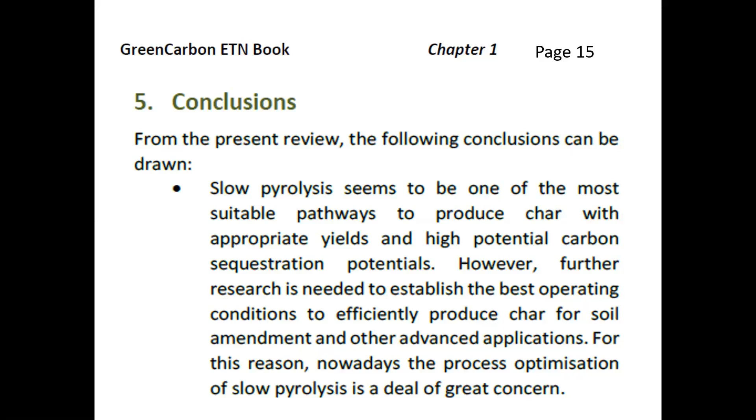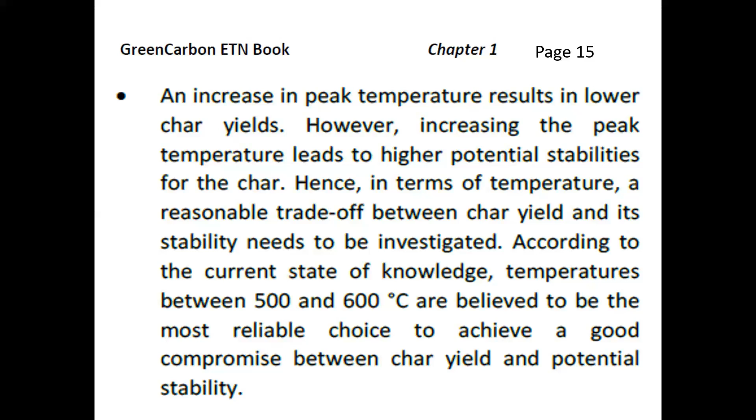The takeaway on this slide is the fact that, in the current state of knowledge, temperatures between 500 and 600 degrees C are believed to be the most reliable choice. And that is to start steering you away from the lower temperature chars, which have previously been used as charcoals, which is a fuel and a chemical reductant for metal reduction. But we'll see that again.

And within this particular book is a whole chapter on industrial technologies for slow pyrolysis. It's quite comprehensive. It is basically building on existing devices that are available in the marketplace. And this talk is going to try to look more at some core fundamental phenomena that should be incorporated into biochar processor designs, which is looking forward to the design as opposed to looking back on its advantages and disadvantages. So we're going to look at constraints, and everyone likes Wikipedia. So a constraint is a limitation or a restriction.

The biggest constraint is we are working with lignocellulosic materials, plants, and they consist of, as depicted here, hemicellulose, lignin, and cellulose. There are resin components and some other minor components, but the majority is cellulose and hemicellulose and lignin. The colors are subject to discussion, but the structures are fairly representative in conceptual ways of the complexity of the mixture we start off with.

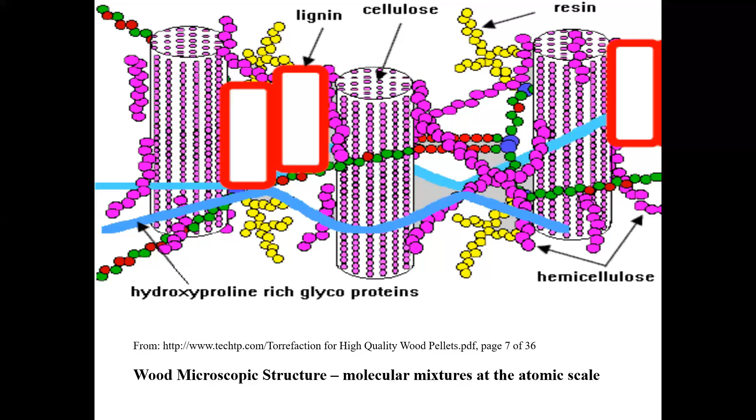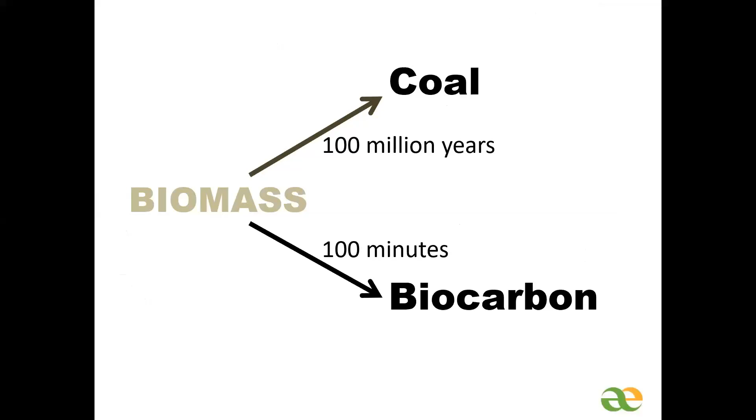The second constraint is we need to be a bit faster than the traditional practices as applied to coal. In other words, we have to be basically 1 minute for each million years of evolution of these materials. And finally, and we'll see this again, when we look at making thermochemical transformation of biomass, we have the ability to go from about 300 to maybe 900 degrees Celsius. And within that range, you make two different materials.

One is the very bottom end. At 300 degrees C, the material is soundly black. It's a char at that point, and it's the best fuel you'll make because it has a lot of volatiles, it burns nicely, and the yield is quite high. If you continue on to higher temperatures, the yield drops off, you have less product to sell, you are transferring more energy to the vapor stream, which could be condensed and burned off.

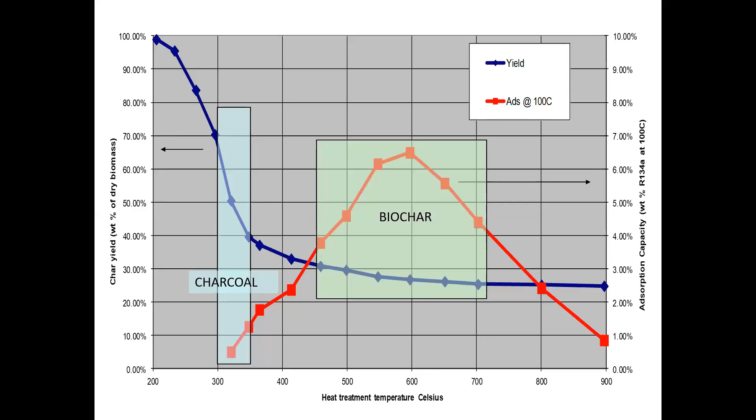But bottom line, your yield is lower, so you have less solid product, but you have picked up a new property, which is adsorption. This is the activated carbon analog. Biochar is Mother Nature's activated carbon. So we need to remember when we're making a biochar that we can't just relabel the bag of charcoal biochar and sell it to the unsuspecting consumer.

So now let's look at some considerations. Actually, the first 3 slides were just the constraints. You have to live within that. Now let's give some careful thought, typically over a period of time, to the fact that as we are heating these materials up from room temperature, 100 degrees C, where they start to dry out, through to 300 degrees C, which, as you remember from the previous slide or 2 slides back, is where these things become charcoal.

They're not yet biochar, but within that window, we see this dramatic set of transformations for each of the major components. There's only one that exhibits a B, which is a glass transition temperature, a polymer phenomenon where the thing becomes plastic and starts pseudo-flowing. But they go from drying to depolymerization to carbonization, and then they completely rearrange. And by the time you get to E, you have made a brand new material.

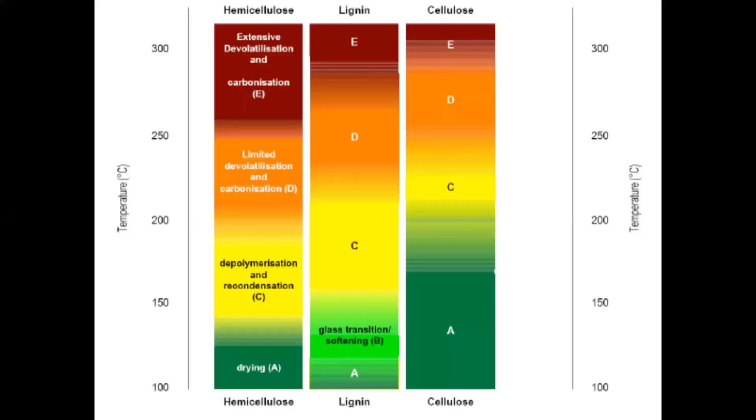They are atoms provided by the plant, put in locations as the plant grew, but the pyrolysis process is going to reconfigure. It's going to remove a fair number of those atoms, 75% of the weight, and it's going to leave the ones behind, which are much more carbon biased, in a new structure.

So we need to do more than just look at it and declare, yes, it's the right color, therefore it must be biochar. What is happening as we go all the way up to 700, 900 degrees C is we are subjecting the solids to thermal conditions they have never seen before. And therefore, we start devolatilizing, losing smaller molecules, some carbon, but predominantly the oxygens and the hydrogens form volatiles and they escape and they're gone.

And what's left behind is the carbon atoms, which then link up to start forming these 5, 6, and 7 membered rings. What's not shown on this slide is what's in between these. These are not all hovering in ether. What is not shown is the tars. We have other materials that haven't yet formed the aromatic clusters or integrated into a graphene sheet, so to speak. But they are there, heating and continuing to consolidate.

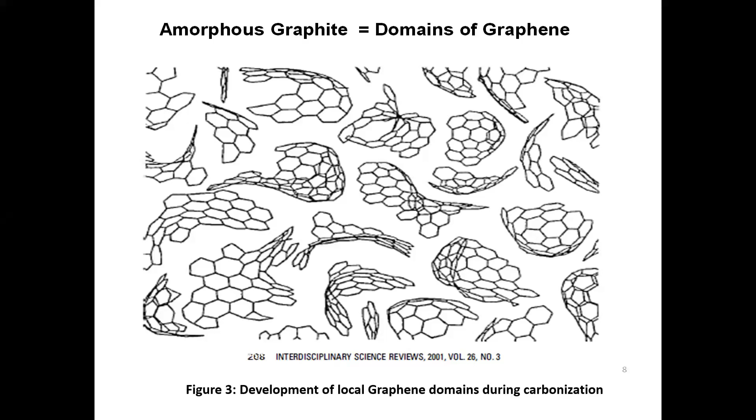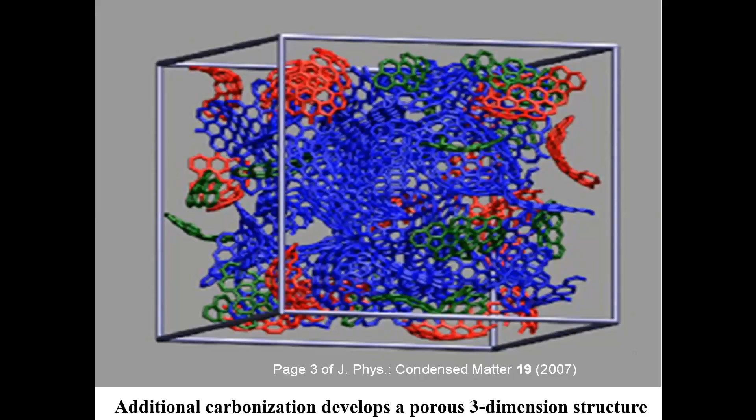One of the other considerations is all the work that's been done. Charcoal is essentially the first man-made modified chemical material. Take wood, char it, you make charcoal. Charcoal's advantage is it burns with much less smoke, so you can burn it inside the cave and cook over it. There's some great work that's been done. I refer everyone to Antal and Grønli's work of 2003. It is, however, charcoal centric.

He's viewing this material as a fuel. He is not looking to any great extent at the unique qualities of biochar, like the microporosity and the edge chain functionalities that play an important role. He does give some lip service to renewable fuel, reductant, absorbent, and soil amendment, but this is pre-biochar days, beyond the scope of this article. However, this article is brilliant, and I urge everyone to access it.

Within there is one of the temperatures that we convert wood to. This is actually higher than charcoal, lower than a good biochar. The important concept is it trifurcates the biomass into three streams. A solid, the carbonized residue, biocarbon, 35% of the weight at this temperature, 57% of the carbon atoms. Then there are volatiles, including the water, and then you have tars. The volatiles and the tars leave as vapors and can be recovered, although the tars may not leave entirely, as we'll see.

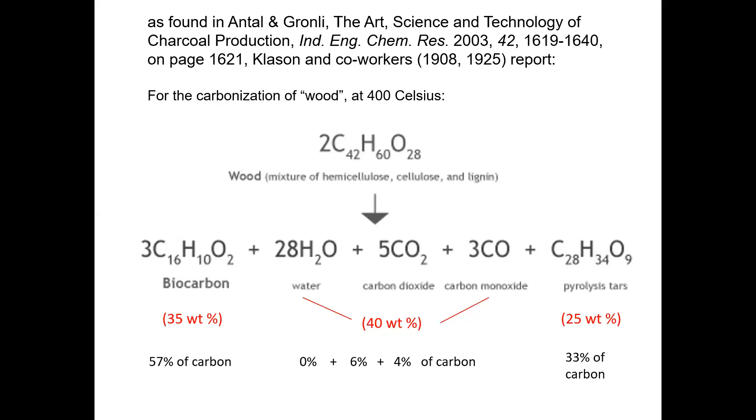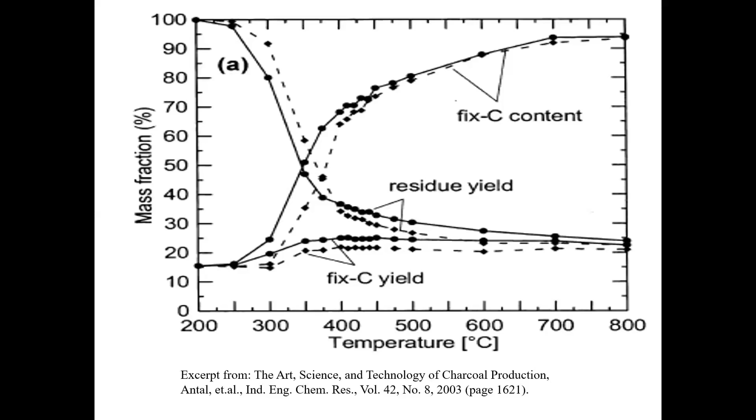So in Antal's work, there's a tremendous amount of data that you don't have to reinvent, but you should respect. The people who tell me they've got a new biochar process and the yield is 75% solids need to respect the fact that we know they're lying, or they're just bad scientists, or they're selling us a bag of grit. So get to this data. These are very important trends. They're going to occur in your work and in your pyrolyzer design.

Here's an example of the carbon concentrations and the oxygens and the hydrogens. It gives you an idea of what temperatures you'd have to get to.

If you believe in H to C organic ratios as a goal, then you need to get yourself to 400 to 500 plus to even think about being in that, because these are mass fractions, weight. These are not mole fractions, and H over C organic is a mole ratio.

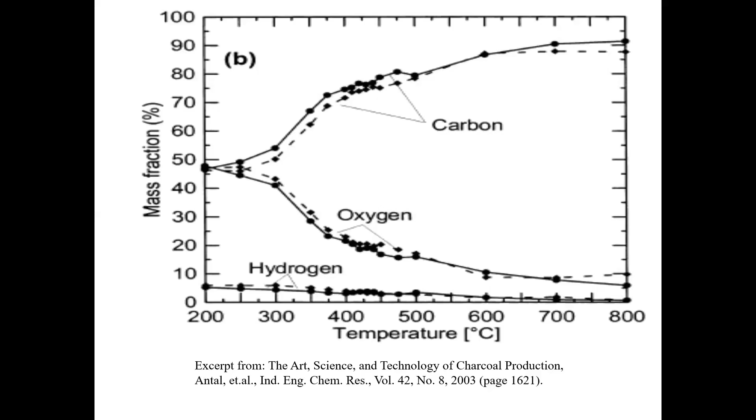And in addition, there's a paper out there which I am sure absolutely no one has ever read, and that's because it was given in a perfectly cushy conference in Banff, Canada in 2009. And I was with a company that was looking at using biomass to make biocoal. And so we looked at blending the material in with coal, and we did a lot of thermal analysis. And in there, you'll find some smoothed out data, which is probably not quantitatively accurate, but it is qualitatively representative.

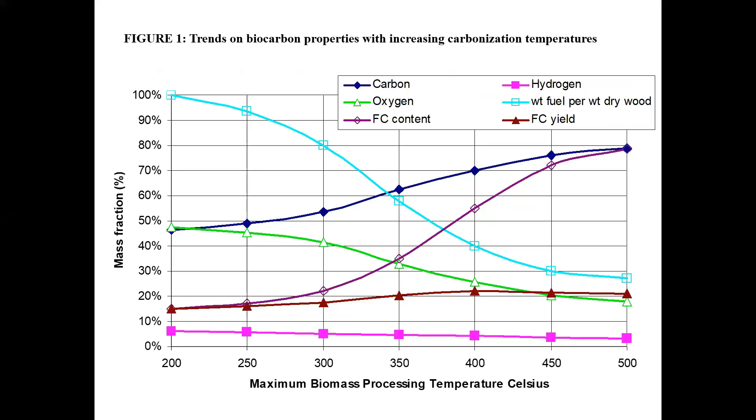But again, these are important guides for you to think about when you're starting to put together a processor design that's going to be moving materials in and taking materials out. So don't reinvent these wheels. Get the data, use it, and then if you need to refine it or modify it, you can.

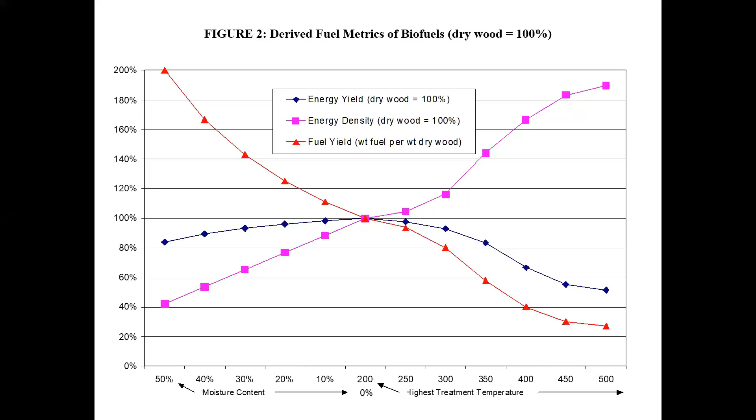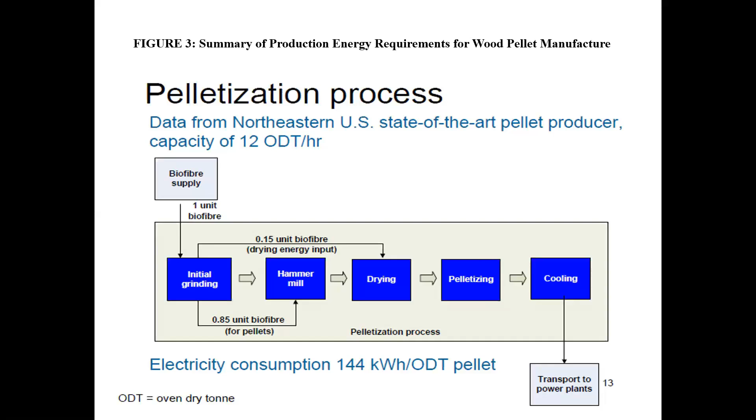Back to one of the curves in that previous slide, the split one with the moisture and then the temperatures. You can very quickly see that if you're torrefying, you don't need to start with anything that's got more moisture than 30% because your torrefaction won't give you back enough energy to keep it going. So you're either going to have a separate energy stream, which we saw in drying for the pellets, 15% for drying the material, or you're going to have to supplement it with natural gas or some other energy source that we're not allowed to use anymore.

But it also points out that at 350, we now are isoenergetic with 50% moisture, which is about as bad as biomass gets. A fresh cut tree is about half water and half biomass. And then beyond 350C, which is really just getting into the biochar region, actually you're not there yet, you're just leaving the charcoal region, you have lots of excess energy.

And that's one phenomenon of any properly designed biochar producing process: a lot of energy is coming off in that vapor stream as tars and non-condensables. They need to be dealt with. They could either become additional products, but they have to be properly oxidized if they're going to be discharged because they represent an enormous source of VOCs and atmospheric pollution.

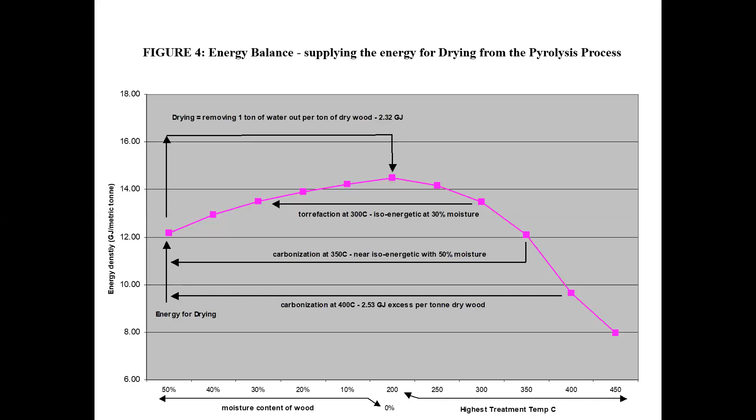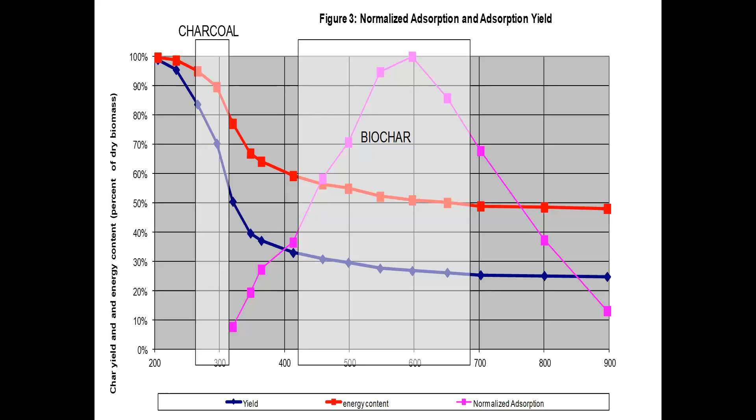So there is an improvement, which is significant and is also something that results in charcoal being used as a fuel. We had an old saying years ago that it shrinks to about half the volume. Its weight is a quarter, its volume is a half, therefore the density goes to about half that of the biomass.

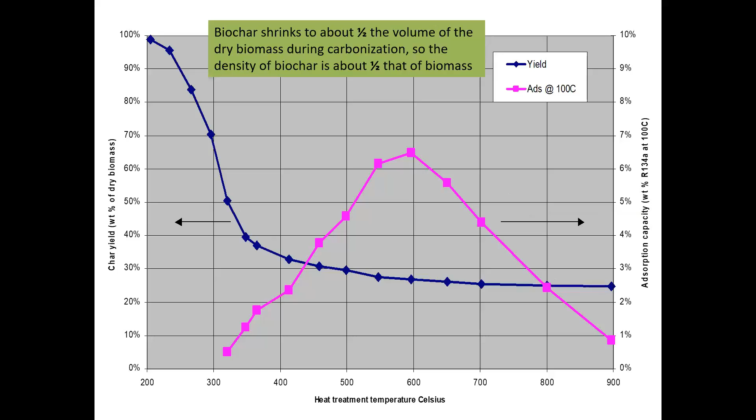De facto, somebody must be thinking, why does the peak go up and down? What's with the sort of mountain that says 600 is the optimum and then after that things fall apart? Some work was done years ago in which we looked at the skeletal density, and what we find at the 600-degree mark is that the skeletal density of the graphite in the biochar is increasing from 1.5 to 2.0. Pure graphite would be 2.25.

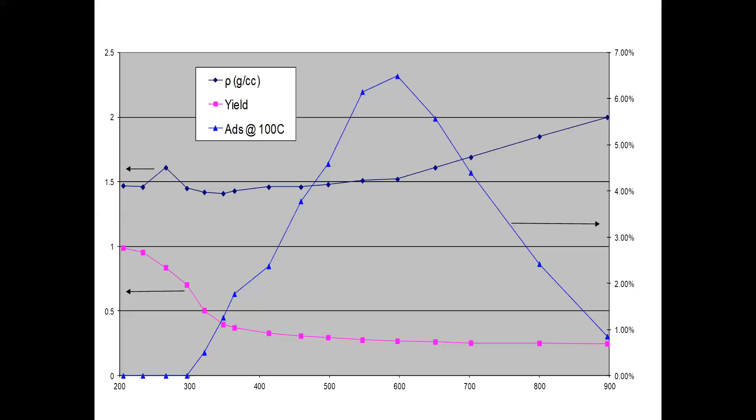And so what is in fact happening, as has been suspected, is the graphene sheets are starting to collapse onto each other, making a denser structure with less pore volume available, but surface area is a reasonable analog for adsorption. So it falls off. So you destroy a property you want to maintain. You can kill biochar.

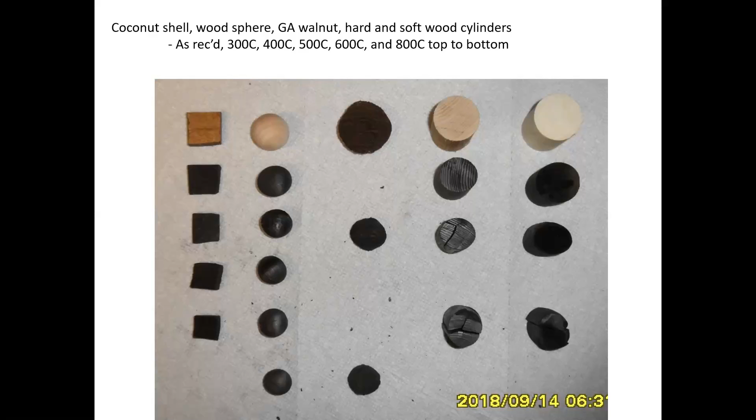So again, these are physical properties. A number of people over the years have said, I put in wood and then I run it through my heated screw and it comes out and it's only half full. Well, yeah, that's because this stuff condensed. It consolidated chemically at the molecular level and in the real world. So what you're seeing is what's really supposed to be happening. So you might as well plan on it. Again, build on known knowledge.

This is one that we really need to focus on, which is the fact that in biochar and in charcoal, there are two kinds of carbon graphite being created. One is created purely out of thermal consolidation. The material never goes through a plastic or a liquid phase. And the second is one in which the tars and the vapors condense onto an existing charcoal surface, because graphite surfaces, when they're formed, adsorb immediately anything that's around them. And one of the things they can absorb is the tars. And those tars then cook and decompose.

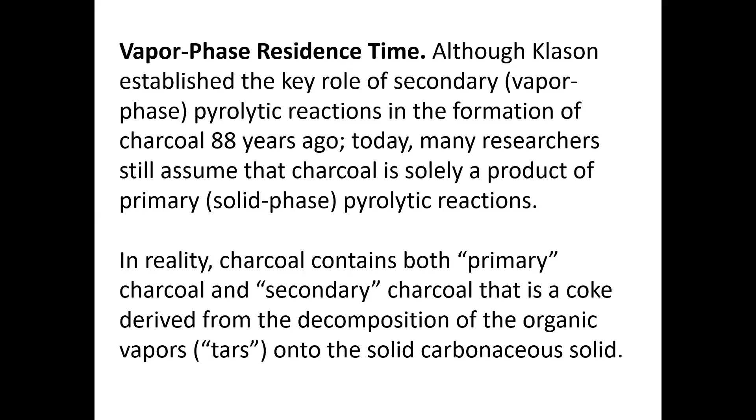So what we find, and this is a very key aspect of pyrolyzer design, is sweep, as I call it. In other words, to what extent are you pickling the char in its own juices versus having some kind of vapor flow that moves those vapors that can recondense on the char out. And the reason that is important is that secondary char has very little adsorption. It actually takes away adsorption because it tends to adsorb onto primary char adsorption sites and then coke out, turn into additional char, and cover those surfaces and remove those volumes.

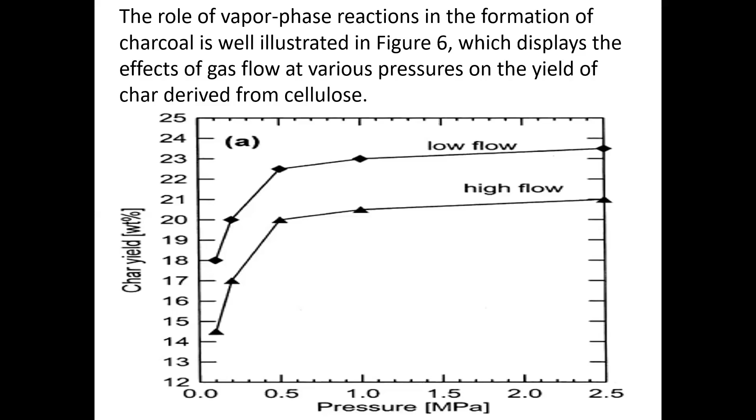This is from Antal. He's really into high pressure stuff. At high pressures, you make higher char yields. That's because you actually intentionally condense these vapors into the charcoal. So for any process or design, we need to ask ourselves, to what extent are these vapors that are being thrown off at various temperatures likely to be reconsolidating into the char, and frankly, while increasing the yield, deteriorating the actual adsorption property we may be wanting, because it has some unique features that really distinguish biochar from shredded tires and from activated carbons.

So we have from Antal some quotes. Charcoal is black. Yes, we got through that earlier.

It's got some physical properties you can measure. And in addition, it has, and this may come as a surprise, it certainly comes as a surprise to the processor designer, the reactor designer, when it happens, which is there are exotherms. You know, you're heating something up. Generally, they're endothermic. They're taking in heat, energy to move them up the temperature scale based on heat capacity.

But there are a couple of periods where really without any additional outside vapor, this isn't combustion, this isn't due to oxygen, it's due to the tars getting to a point where they are too hot to be tars anymore, but they're too heavy to volatilize, and what they do is they disproportionate into graphene sheets. So graphite forms out of some of the carbon atoms, and then a small portion of them is given off as volatiles, but the net heat release of forming all those aromatic rings is so significant that there are these notable exotherms. So that brings us to my first concern.

And concern, from Wikipedia, is an uneasy state of blended interest, uncertainty, and apprehension. And frankly, that's a great description for a concern. Because from Antal's work, we note that these exotherms represent somewhere in the neighborhood of 6 to 10% of the heat content of the feed. So by heat content, they mean the total amount of heat that would be released if you burned it in oxygen or air and made heat out of it. That's how we would measure it, hence the name heat content.

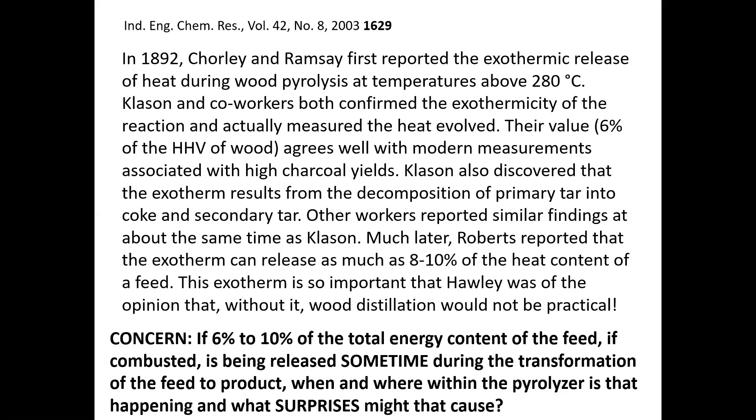And there are certain geometries. I mean, this is actually what causes retorts to take off, is this exotherm that suddenly bumps the temperatures up so much higher throughout the mass. And it also is what causes sealed retorts to blow up. But again, this is the concern. People go in and put these mechanical devices together, and they're not aware of the fact that halfway through you're heating it, and it turns around and decides to heat back and push you very rapidly to a new temperature regime. So that's a big concern.

The other concerns are a little more academic. These are methods used by chemical reaction engineers, or methods used by the graduate advisor of chemical reaction engineering graduate students to torture them, but the basic use is to try to figure out what's going on inside. So there's a couple of ways of thinking about processors and the flows of material through them. One is called residence time analysis. In other words, what is the distribution of times that materials spend in there? And if that distribution is broad, that is going to result in a broad distribution of properties in the biochars.

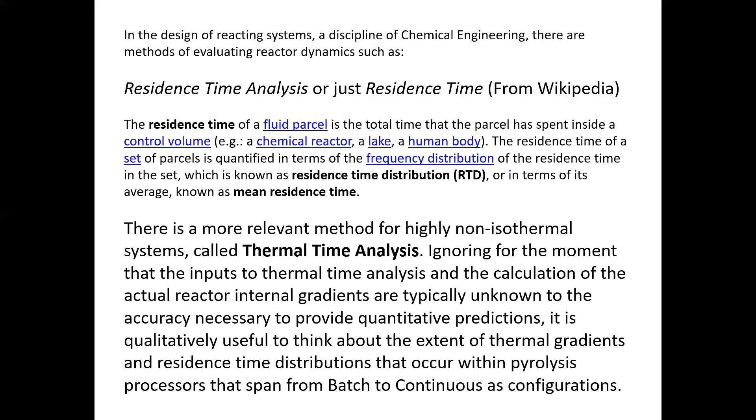Similarly, there's an analysis called thermal time analysis, which is basically the residence time weighted times the kinetics of the temperature they're at, to see how much thermal time occurs. So it could be that, because of reaction rates, 10 seconds at 600 degrees C equals 2 hours at 250 degrees C, or even worse. So it's useful to look at the processor and decide to what extent am I going to have significant thermal gradients within it, because these are things you would like to minimize in an effort to make a fairly uniform biochar product.

At the end of the day, I have to say the biggest concern I have is that biochar is not an easy product to make, especially to make exactly the way you want to make it. Excuse me. Sorry. Some of the challenges are the material properties. It's a poor thermal conductor, yet it has a relatively high heat capacity if the biomass comes in wet.

The conversion is entirely dictated by, or dominated by, the temperatures that are reached. But those things have exotherms that can move local temperatures in lots of different directions and can create oscillations in continuous processes that are trying to make the same product, but because the incoming product has variability, the outgoing product has the same amount, if not more. And then at the end of the day, my biggest concern is that biochar is a highly variable material representing a wide range of properties, yet the impact of those variations on performance of biochar and the range of applications practiced or anticipated is essentially unknown.

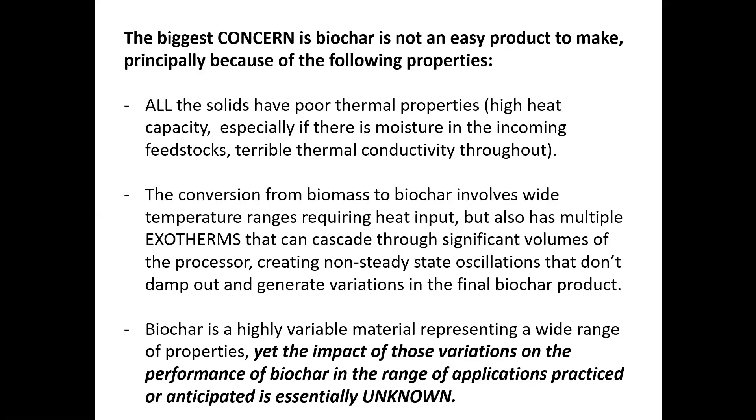So that makes it very difficult to decide what you want to make, because you don't know whether you want to leave tars in or take them all out, or if you want to do modifications like the previous talk. I tell people making good biochar is really no harder than making good wine. Start with good grapes, don't make any mistakes, be lucky, and every couple of years you'll get exactly what you want. Biochar is actually easier than that.

So the consequences. We're getting to the end. The result or effect of an action or condition. The consequence of pyrolyzing biomass to biochar is to create a material that is really so far beyond a fuel, the charcoal. You would have stopped earlier, used it as charcoal, moved on. But no, we are making a material that has new properties and is entirely formed with new structures that we can control to an extent.

By the pyrolyzer conditions and design, we can control it, also to an extent by the choice of raw materials. And it's very, very flexible, so it gives us a tremendous amount of latitude. So we really have a fairly straightforward challenge. Heat it up, don't blow it up, and you're going to make something brand new that you can do things with. But you have to learn how to control that. And that's the challenge of designing pyrolyzers and testing them and then figuring out how to run them.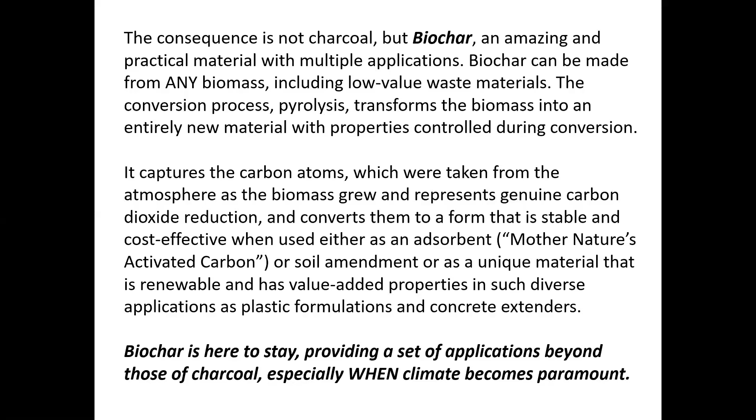Again, it captures carbon atoms from the sky. It's a genuine carbon dioxide reduction mechanism for atmospheric CO2. It's a terrific soil amendment. It has some additional applications we're just learning about as essentially mechanical materials in plastics and in concrete. And at the end of the day, biochar is here to stay, providing a set of applications beyond those of charcoal. You know, Adam made charcoal so Eve would cook dinner, and we're still using charcoal to cook dinner in a lot of places. We can do more by making biochar.